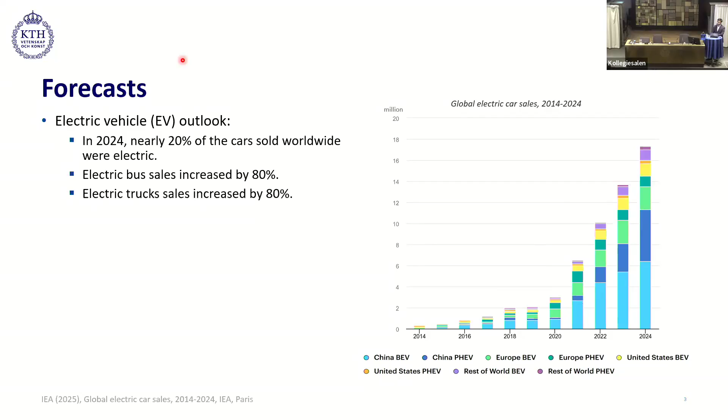Let's directly jump to the forecast. The International Energy Agency published a report in 2025 stating that in 2024, around 20% of cars sold worldwide were electric, including both plug-in electric vehicles and battery electric vehicles. On top of that, the sales of electric trucks and electric buses also increased by 80%.

According to this study released in 2021, approximately 8 to 20% of the cost of a battery electric vehicle is taken by the electric powertrain, and out of that 8 to 20%, 45% is taken by the inverter itself. Therefore, with electrification, the demand for electric energy converters as well as semiconductors is also projected to increase.

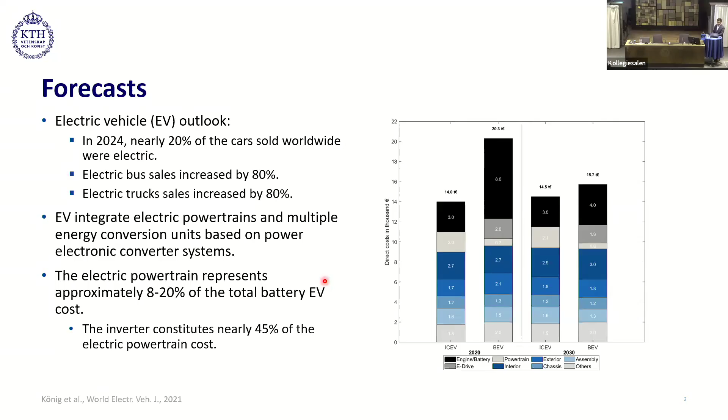We see that silicon carbide MOSFETs are becoming a favorable and popular technology, at least in EV applications, because they provide advantages over silicon devices. For example, they have better thermal conductivity, higher melting point, higher energy band gap, and high critical electric field. In 2022, McKinsey released a report projecting the growth of the silicon carbide market, saying it will grow by a CAGR of 26% per annum.

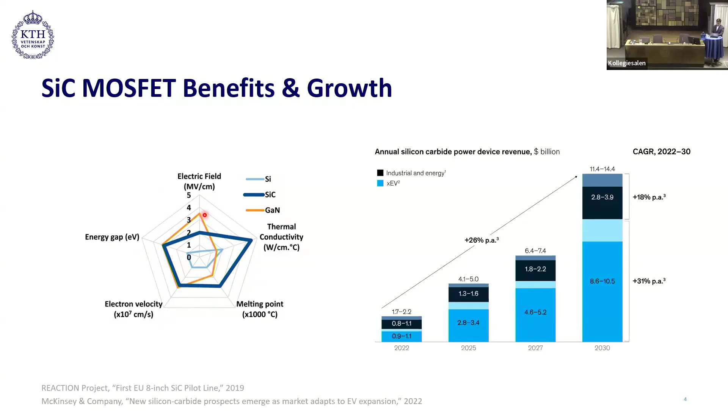With adopting new technology, it's also important that we understand it from the reliability perspective. In 2011, an industrial survey found that in power electronic converters, it's basically the power semiconductor devices that are most prone to failure. Even though this study is quite old, I think it still holds true today.

In another study, they identified that the primary cause for these failures is temperature, both in steady state form and in the form of temperature cycling.

Here we are looking at the picture of the temperature inside the power module. We see that the temperature inside the power module cycles in electric vehicle operation, both at low frequency, and if we zoom in, we see also the high frequency temperature cycling.

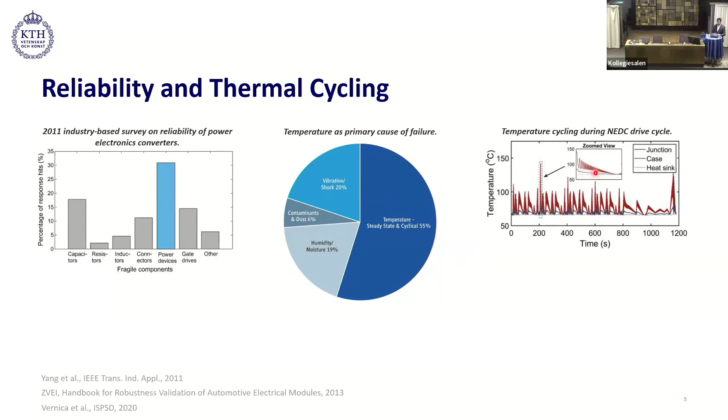Coming to the root cause of these thermomechanical failures that I have investigated. Here we are looking at the cartoon diagram I made of the power semiconductor module. We see that the power module is made of different materials. For example, in this case we see aluminum bond wires, and a silicon carbide MOSFET soldered on top of a DBC. The DBC has a ceramic with copper metallization on both sides, and that DBC is again soldered to the base plate, which is made of copper.

If you look into this picture, we see that the coefficient of thermal expansion of these materials is different. For example, silicon carbide is 3.4 and aluminum is 23. This introduces the coefficient of thermal expansion mismatch, and also the Young's modulus is different. In general, the thermal and mechanical properties of these devices are different.

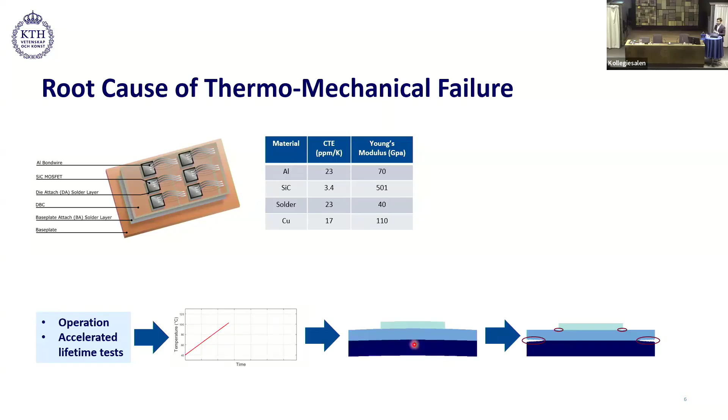During operation, the temperature inside the device cycles because of power losses, which results in thermal expansion and contraction of these materials. Since they have different coefficients of thermal expansion, the materials expand and contract at different rates. This eventually results in interfacial fatigue, which generates cracks, and because of the crack, delamination occurs, which eventually results in semiconductor device failure.

Here is one picture of a device that failed in KTH. It might not be clearly visible, but there is a crack at the interface of the bond wire on both sides. Therefore, this device failed at the end of the test due to bond wire liftoff.

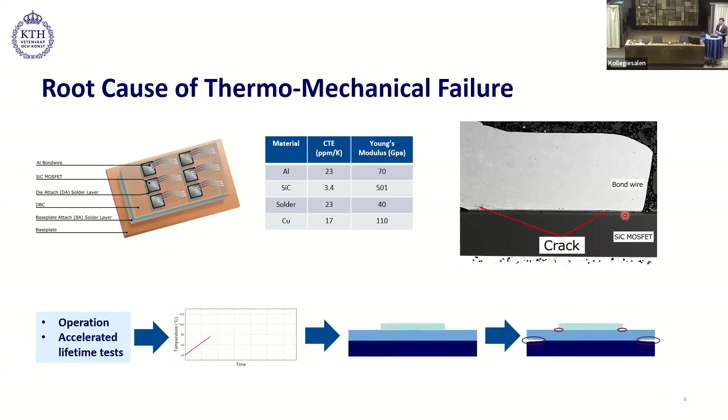Coming to the motivation, we were motivated to evaluate the thermomechanical performance of semiconductor devices, as well as develop health diagnostic methods to detect package-related degradation.

So we had two objectives in this thesis. The first objective was to do the thermomechanical analysis of conventional and advanced silicon carbide MOSFET packages. This resulted in two contributions, and in those two contributions we generated three publications. In objective 2, we wanted to develop health diagnostic methods using the lifetime data gathered by degrading TO247 packaged silicon carbide MOSFET devices. Under this objective, we had 3 contributions, resulting in 5 publications.

Now I will go through each of these contributions one by one and present the results. Coming to contribution 1 under objective 1, here we will look at the thermomechanical performance of single-sided cooled packages.

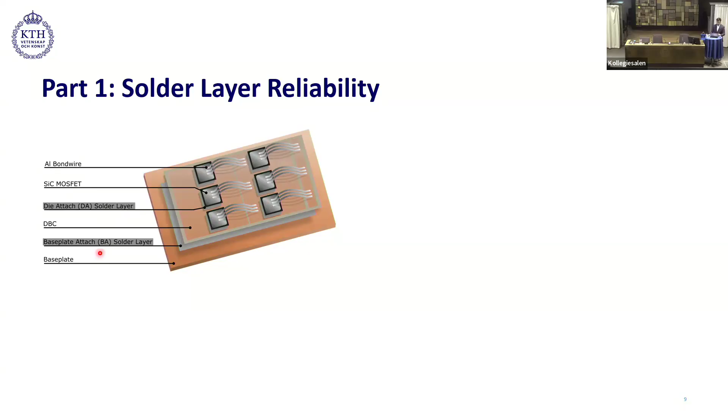In part 1 of this contribution, we will look at the solder layer reliability. We are again looking at the picture of a power module, and we see that there are multiple dies connected inside these power modules. A power module can have many dies inside it, and these dies can be at different locations. We see that the reliability of the solder layer, present in the die attach and the base plate attach layer, can vary depending on the location and the number of dies in the module.

We did a simulation study using finite element modeling, and divided the study into 3 packaging configurations: symmetric, where the die was located at the center of the package; asymmetric, where the die was located in the corner; and full power module, where we had 3 dies connected in parallel.

First, we will look at the thermal performance of the solder layers. This was done using power cycling tests, PCT-sec and PCT-min. According to the ECPE AQG 324 standard, power cycling is divided into 2 categories: PCT-sec, meaning the heating time is less than 5 seconds, and PCT-min, meaning the heating time is more than 15 seconds. So PCT-sec can also be called a fast power cycling test, and PCT-min can be termed a slow power cycling test.

We ensured that the temperature cycling inside the module, or the junction temperature, remains the same across all cases, so we adjusted the heat losses accordingly. Another thing to note is that the base plate attach solder layer temperature cycling is different during PCT-sec and PCT-min. In PCT-min, the base plate attach solder layer exhibits higher temperature cycling.

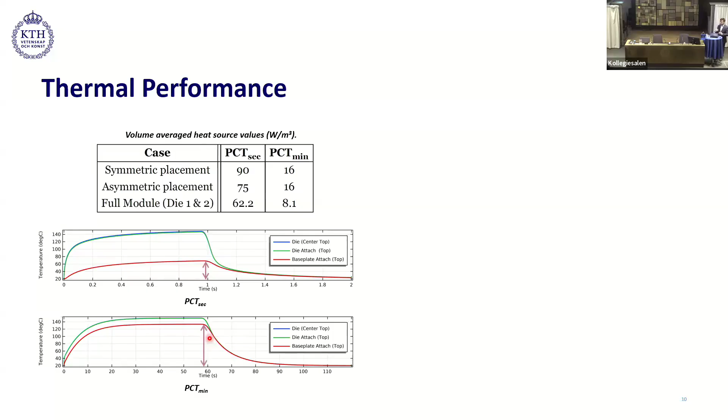Looking at the temperature distribution in the die-attached solder layer during PCT-SEC. We see that depending on the location of the die inside the package, the temperature distribution also varies. For example, in symmetric condition, the high temperature region is presented towards the central region, representing the center part. However, in asymmetric, the high temperature region moves more towards the corner, and the same happens in the full module.

Due to the thermal coupling effect, the temperature in the full module is also impacted by the second die, which is connected in parallel. When we look at the temperature profile plotted across this diagonal, we see that during PCT-SEC, a high temperature gradient is observed. However, during PCT-min, this temperature gradient reduces. Another important thing to note is that in asymmetric and full module cases, the region closer to the DBC corner and edges has higher temperature than the other end.

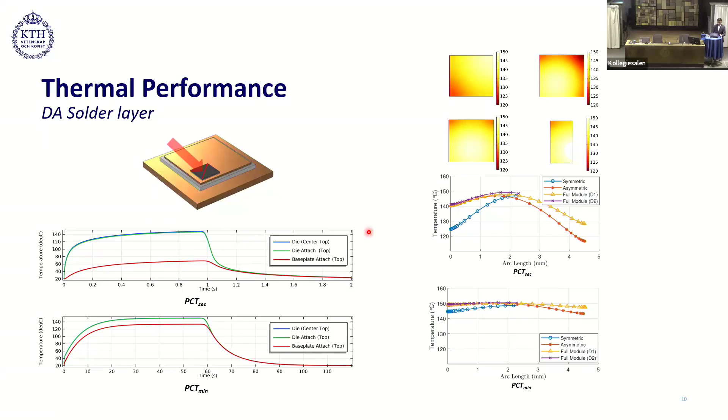Now looking at the thermal performance of the base plate attached solder layer, analyzed during PCT-min. We see that depending on the location of the die inside the package, the temperature distribution inside the base plate attached layer also changes. For example, in symmetric, we have the high temperature region in the center. However, in asymmetric case, the high temperature region moves towards the corner or the edge. Additionally, the presence of more die introduces more high temperature region, I will say.

Now I will go through the mechanical performance of the base plate attached solder layer. Again, we use accumulated viscoplastic strain as a performance criteria, and this was done during PCT-min power cycling. In the symmetric and asymmetric case, we observed that it's mostly the corner regions which exhibit higher viscoplastic strain accumulation. We didn't see much difference between symmetric and asymmetric, but in the full module, a big portion of the edge experienced higher viscoplastic strain accumulation.

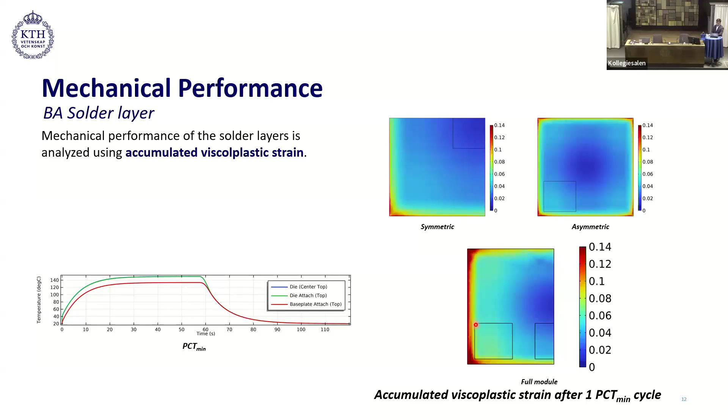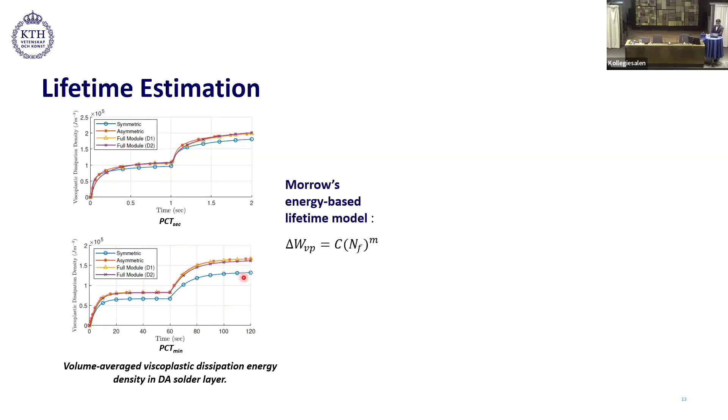We also did a lifetime estimation study using Morrow's energy-based lifetime model. Here, we used viscoplastic dissipation energy density in the die-attached layer to calculate the lifetime of the die-attach. We see the viscoplastic dissipation density during PCT-SEC and PCT-min, and depending on the configuration, the dissipation energy density also changes. We feed this dissipation energy density into Morrow's energy-based lifetime model, and the software gives the lifetime distribution in the die-attached solder layer. We see that in the symmetric condition...

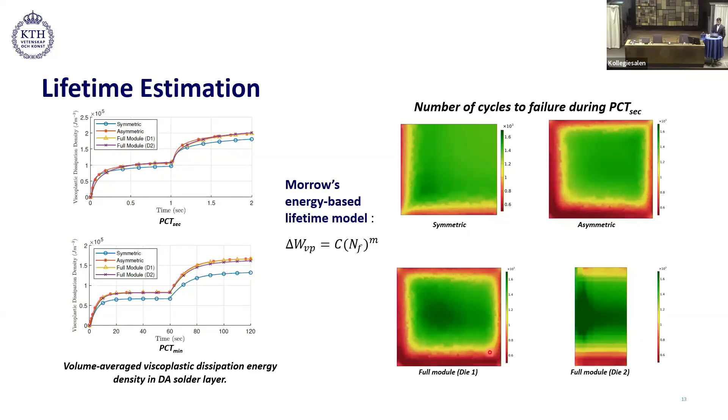In all the cases, the solder material experiences a lower number of cycles to failure around the edges, like here and here, represented by red and dark red color. We see that the symmetric power module exhibits a higher number of cycles to failure in comparison to the asymmetric and the full module. In these regions, they have the minimum number of cycles to failure. Plus, in this region, in the full module, the number of cycles to failure also reduced because of the presence of parallel die.

If we look at PCT-min, then the lower number of cycles to failure distribution is uniformly distributed around the edges. So from this study, we concluded that the location of the die inside the package, and the number of dies we have in parallel, affects the reliability of the solder material used inside the package.

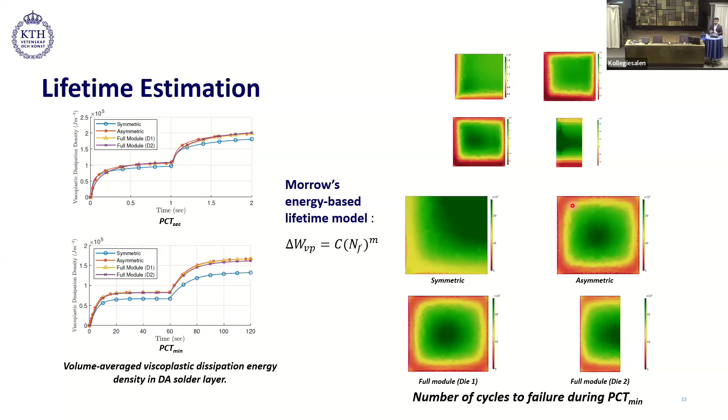Coming to part 2 of this contribution, here we analyzed single-sided cooled packages, advanced packages. This study was divided into 4 packages: aluminum, the one with aluminum bond wire, second with copper bond wire, third with sintered copper clip, and fourth with sintered copper foil, having copper bond wire on top. In order to make this analysis simpler, we divided these packages into 6 cases. It's also important to note that in the die attached layer and in the base plate attached layer, we are also investigating solder and silver sinter in order to do the comparative analysis.

Now coming to the thermal performance of these packages. This was evaluated under steady state condition. In this figure, we are looking at the power losses that the module was able to handle for the same steady state junction temperature.

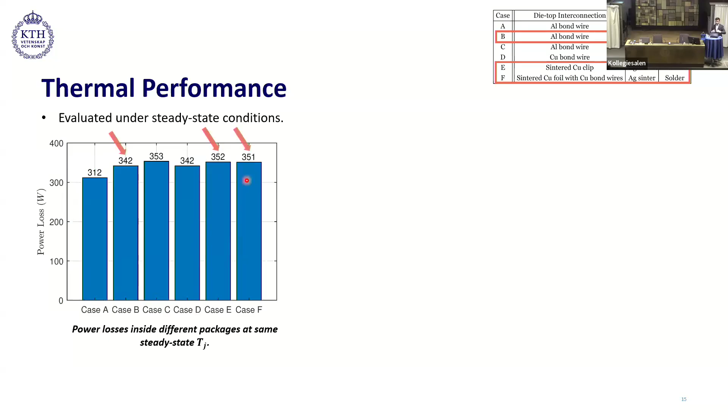If we focus on the first 3 cases, we see that we have aluminum bond wire on top, but the die attach and base plate attach material is changing. We observed that by replacing solder material with silver sinter, we have better thermal performance. If we also focus on case E and case F, then we see that introducing copper clip or copper foil on top also improves the thermal performance a bit.

In this figure, we are looking at the vertical temperature profile through the die center in case A, B, and C. We see that the temperature drop across the solder, represented by this blue curve here and here, is higher than in silver sinter. That's because solder material has higher thermal resistance than silver sinter.

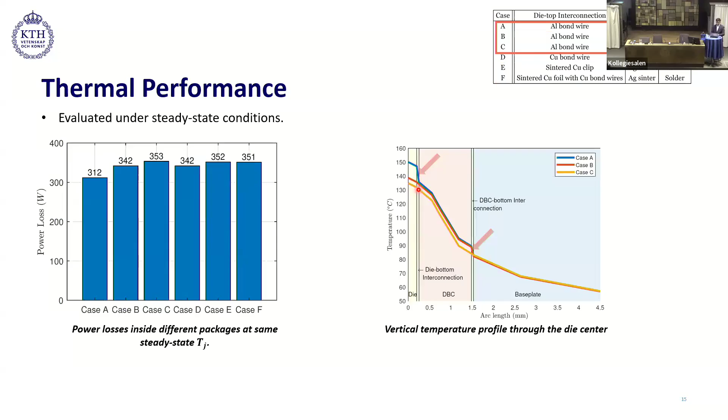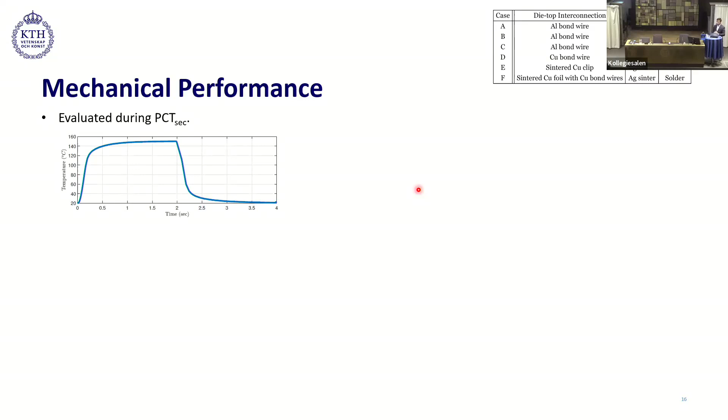Now, looking at the mechanical performance of these packages, this was evaluated using PCT-SEC power cycling. Here, the cooling time and heating time are set to 2 seconds each. First, we will look at the die attach layer, which involves solder or silver sinter, and again we use viscoplastic strain accumulation as a performance criteria.

Here, we are looking at the accumulated viscoplastic strain during one PCT-SEC cycle, and we see that the die attach solder layer exhibited higher viscoplastic strain accumulation than silver sinter.

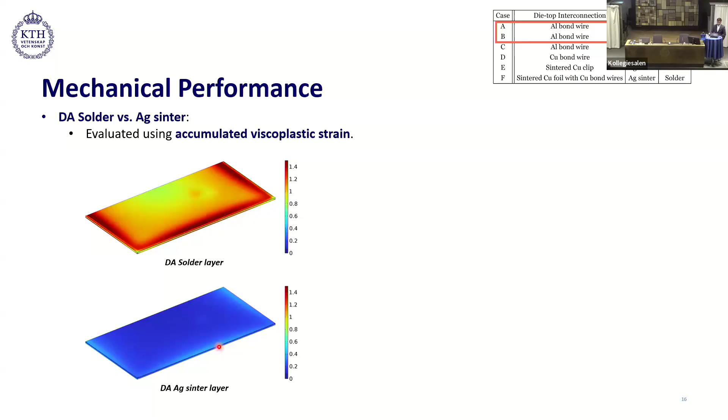We also calculate the volume averaged viscoplastic dissipation energy density in the die attach layer. We see that the solder layer, represented by this blue curve, exhibited higher viscoplastic dissipation energy density than the silver sinter material, which is shown by these plots here.

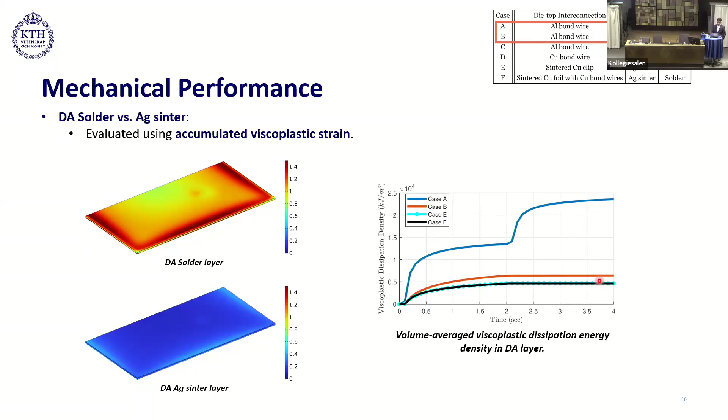Therefore, we concluded that the kind of material we have inside the package, the mechanical performance and thermal performance will change at the die attach. Now we will go through the mechanical performance of the die top side interconnection.

First, we will start with bond wires. So the performance of the bond wires was evaluated using von Mises stress and also accumulated plastic strain.

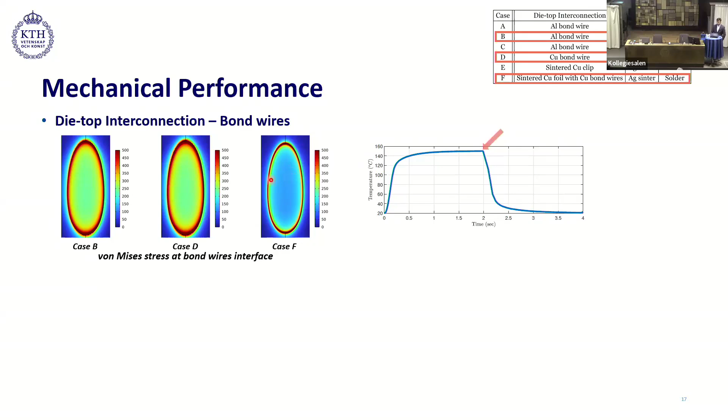Now, looking at the die top interconnection silver sinter, here we see the viscoplastic strain accumulation in die top silver sinter layers. If we focus on this region, then we observe that in case of copper clip, the die top silver sinter accumulated a bit higher viscoplastic strain than what we used in case of copper foil.

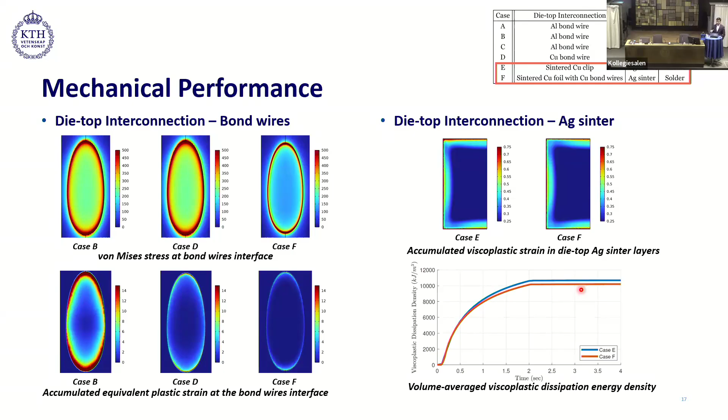Looking at the volume averaged viscoplastic dissipation energy density, we see that it is a bit higher in case E with copper clip than case F with copper foil. So from this study, we concluded that the kind of material we are using inside the package, and also the kind of configurations we have in the module, both the thermal and the mechanical performance can vary.

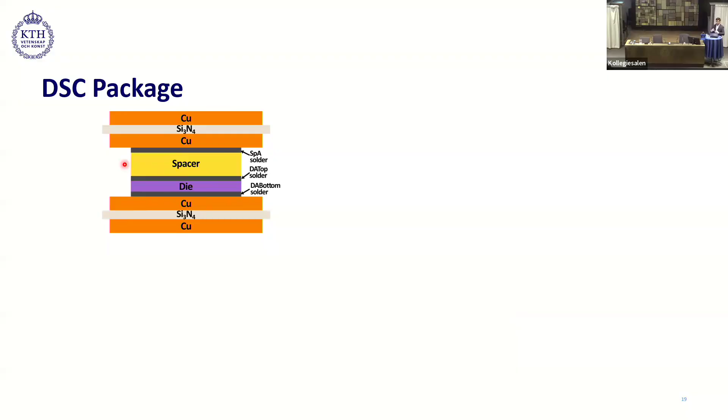Coming to contribution 2 of objective 1, here we analyze the thermomechanical performance of double-sided cooled packages. The double-sided cooled packages are becoming quite famous now because they allow for higher heat dissipation from both sides, top and bottom. However, in order to create some space inside the package which facilitates connecting the gate terminals, we introduce a spacer inside, and we were interested in studying the impact of the spacer material on the reliability of the solder layers.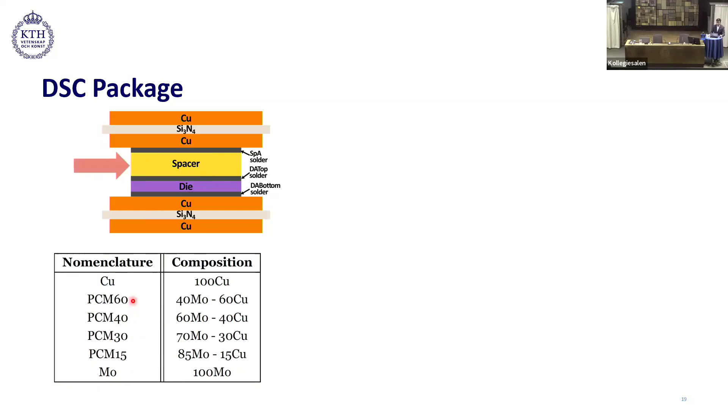We used spacer materials that were composed of different percentages of copper and molybdenum, and depending on the percentage of copper material we have inside the spacer, this number varies. So basically, 60 here represents 60% copper. Since copper has 3 times higher coefficient of thermal expansion than molybdenum and 3 times higher thermal conductivity than molybdenum, the thermal and mechanical properties of these spacer materials will also vary with the percentage of copper and molybdenum inside them.

Starting with the thermal performance of these packages, this was evaluated at steady state. Here we are looking at the power loss that these packages were able to handle for the same junction temperature. We see that double-sided cooled packages, represented by these bar plots, have higher power loss handling capability than single-sided cooled packages. Also, the power loss handling capability increased with increase in copper percentage in the spacer material.

Looking at the vertical temperature profile through the die center, we see that molybdenum exhibited a higher temperature drop across it than copper. That's because molybdenum has 3 times higher thermal resistance than copper.

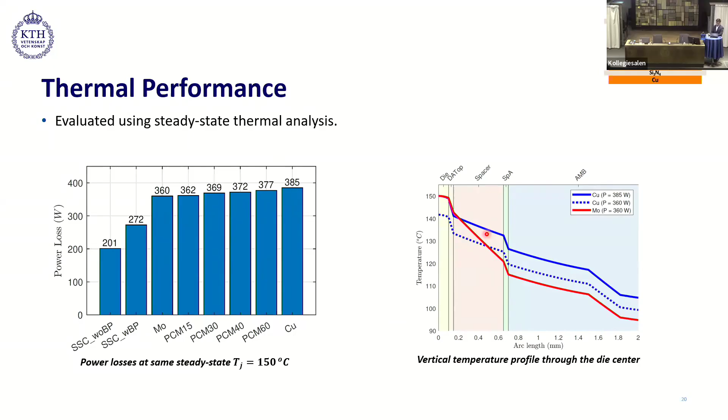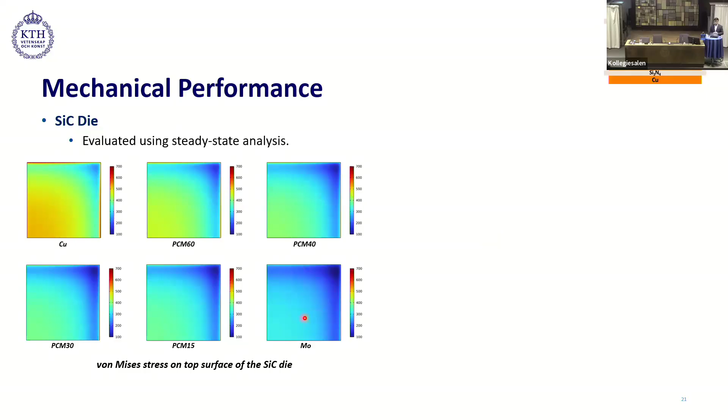Coming to the mechanical performance of these packages, first we will start with the silicon carbide die. This was evaluated using steady state analysis, and we used von Mises stress as a performance criteria. What we see here is von Mises stress on the top surface of the die, and we observed that von Mises stress is higher when the copper percentage in the spacer composite is also higher, and it reduces with decrease in percentage of copper. Therefore, in case of molybdenum, we see minimum von Mises stress on the die.

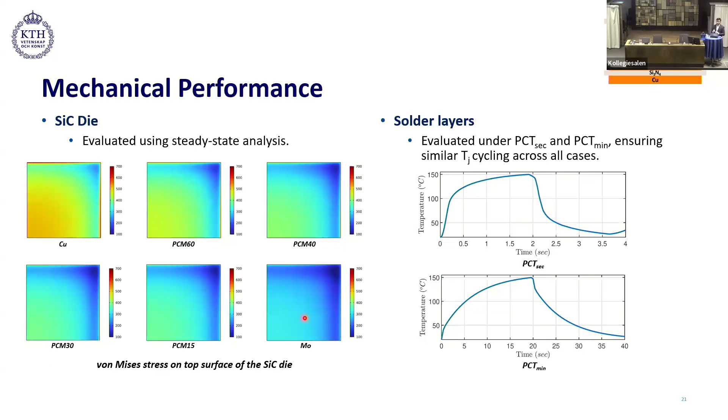The performance of the solder layers was evaluated using PCT-sec and PCT-min power cycling conditions, ensuring that the junction temperature profile is the same in all cases.

In this case, we took a different approach. We basically used the 10% delamination criteria. In this figure, you are looking at the viscoplastic dissipation energy density distribution around the edge, and we see it's uniformly distributed. So we have a quarter symmetric model in this case. We use line 1 to calculate the viscoplastic dissipation energy density.

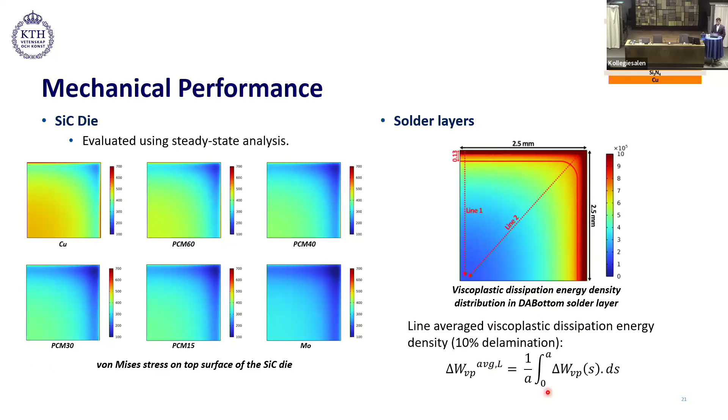Based on the 10% delamination criteria, we calculated this length, which we call crack length, and it is 0.13 mm. Then this viscoplastic dissipation energy density in this crack was fed into this formula to calculate the line averaged viscoplastic dissipation energy density.

Therefore, from the study, we concluded that depending on the kind of spacer material used inside the double-sided cooled packages, the thermal and mechanical performance can both change. Therefore, it's important to optimize the package depending on the operation.

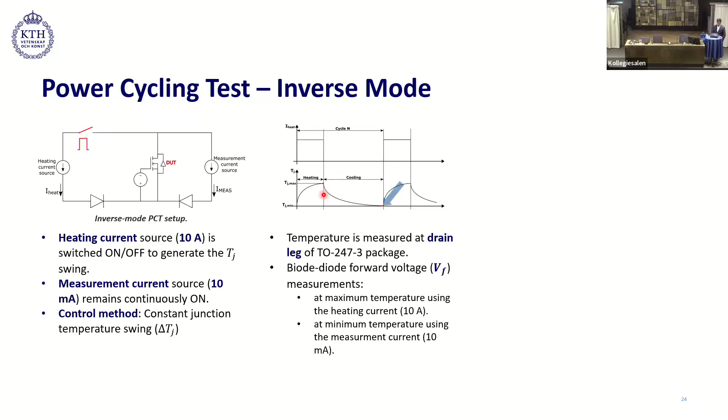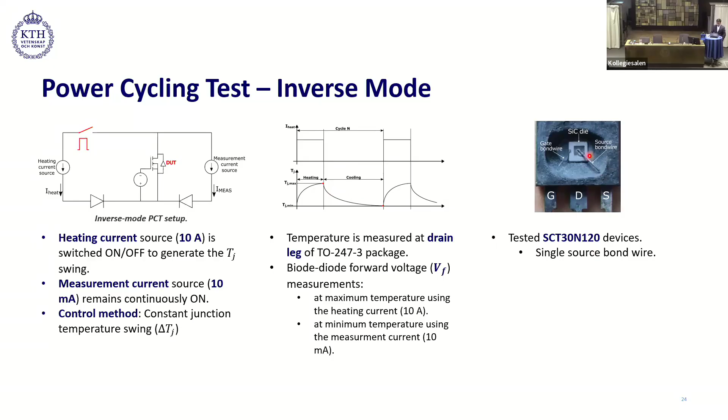We tested the devices from STMicroelectronics. Here is the model number. This device has only a single source bond wire inside it. This is the gate bond wire, but what we are interested in is the source bond wire, which is this one.

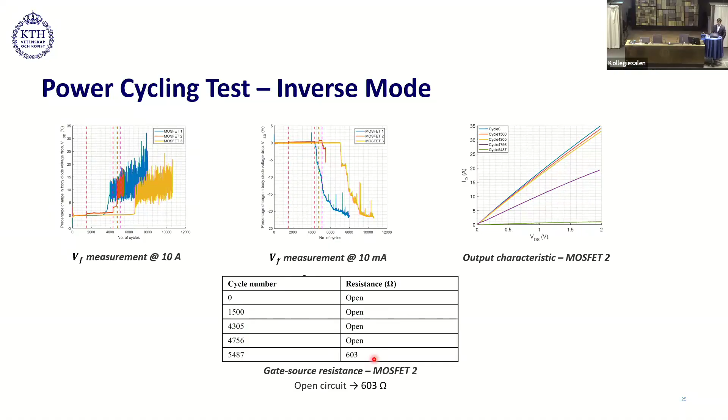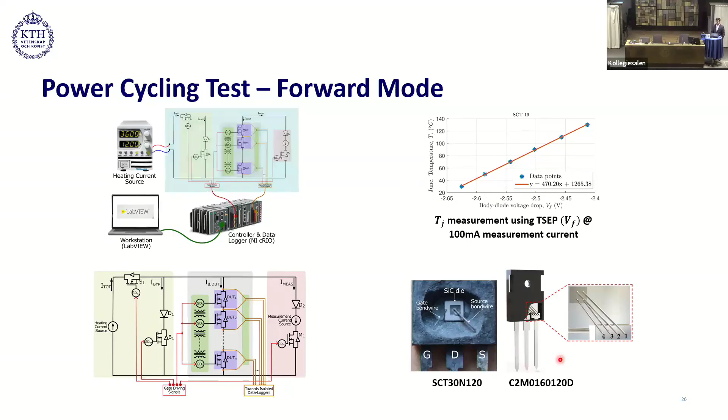We tested two different kinds of devices using this test. The first is from STMicroelectronics with a single bond wire, and the second is from Cree, which has four bond wires connected in parallel.

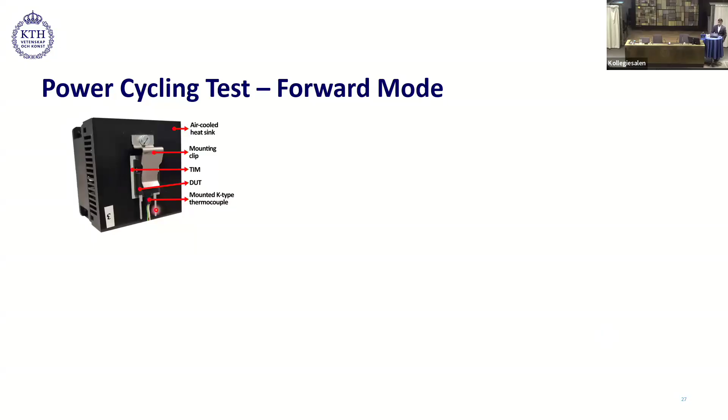This is how the DUTs were mounted. We had an air-cooled heatsink for each DUT, and the DUTs were mounted on these heatsinks with the help of a clip. We have a thermal interface material between the heatsink and the DUT. During the test, we also measured the temperature of the middle leg with the help of a K-type thermocouple.

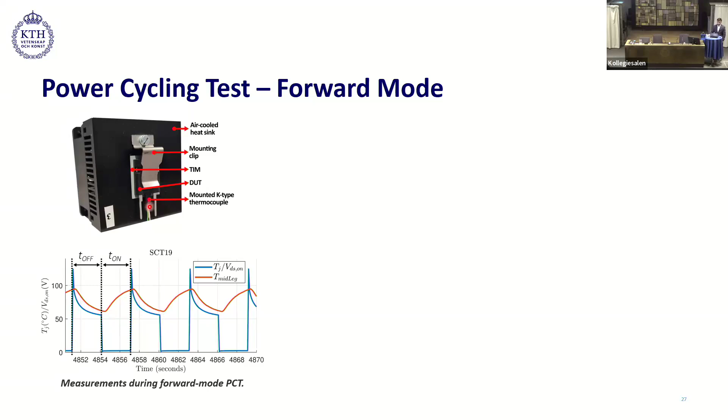Here we are looking at the measurements during the forward mode power cycling test. We see that during the cooling time, T off, the temperature dropped, and during heating time, T on, it represents the on-state voltage. The red curve represents the temperature measurement done at the middle leg with the thermocouple. We see that the temperature increased during heating time and then drops during the cooling time.

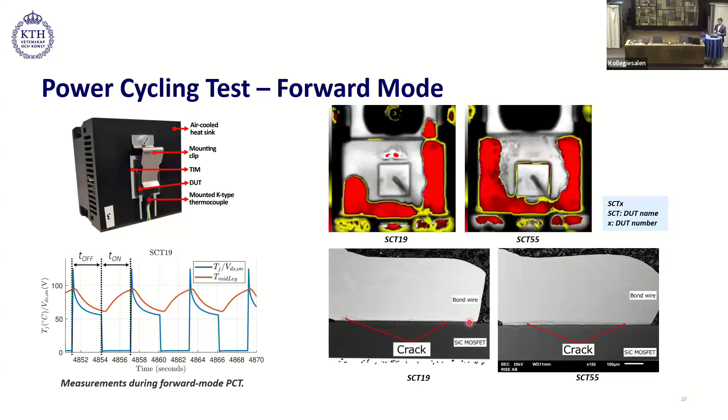We also did cross-sectioning and then took scanning electron microscopy images. In both devices, cracks were observed at the interface of the bond wire. Therefore, these packages have mainly failed because of bond wire failure. So we used their test results to develop health monitoring techniques by compensating on-state resistance.

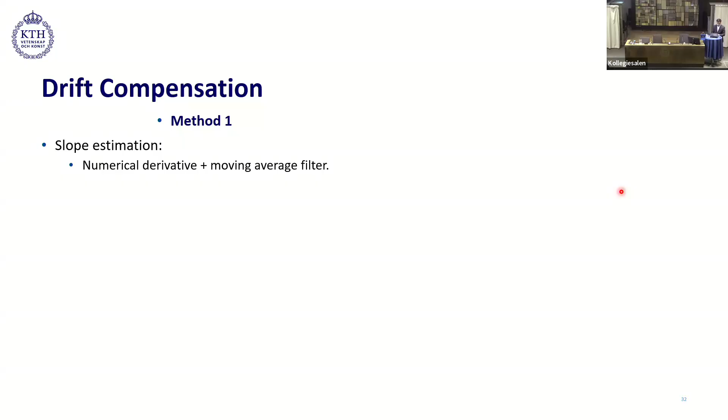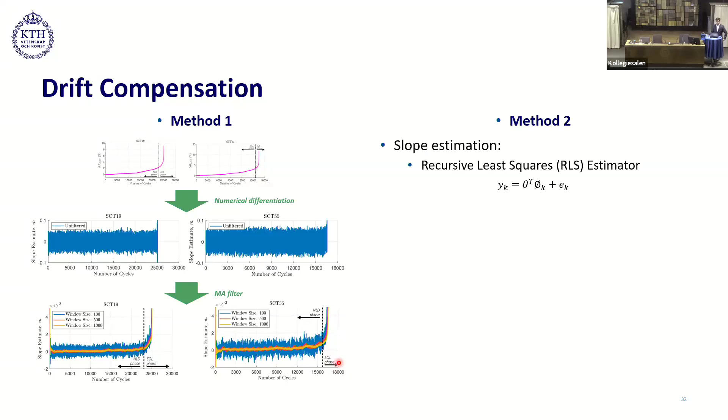We also developed a second method which used a recursive least squares estimator. Here we fed the temperature compensated signal into the RLS estimator, and it directly gives the slope estimates. One important thing to note in the recursive least square estimator is the term lambda, called the forgetting factor. The value of lambda is selected depending on how fast your signal is changing. If the signal is changing fast, it should be lower. But in our case, we have a slow increase in the beginning and then a very fast increase at the end.

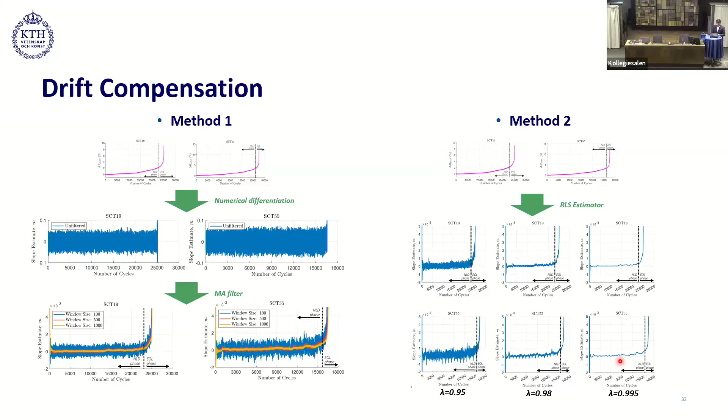So from this contribution, we were able to finally develop a method which can be used to detect package-related failures in TO247 package. We used the same method in the device with multiple bond wires and proposed that this can also be used for detecting bond wire lift-off events in the package.

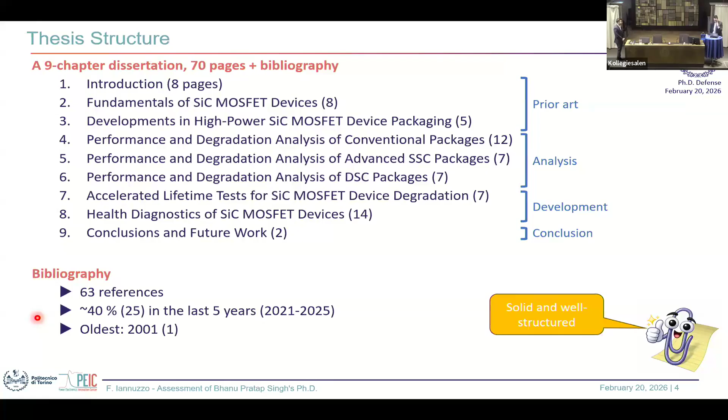Perfect, that's great, let's move to the scientific outcome. You published 1 journal publication plus 2 submitted. I have a little bit of comment here - it's a little bit close to the limit, I would have expected a little bit more in terms of productivity. However, you have scored 5 conference publications, right?

And 5 more conference publications, which for some reason are not included in this PhD thesis. 2 of which are actually relevant to your topic - one is reliability study on SiC MOSFETs following partial failure, and the other one was on online condition monitoring, the other 3 being a little bit further from it. So fine, I would say. I couldn't evaluate these 2 by any means, simply because you didn't include them - I was in principle not allowed to look outside the borders.

Let's move to the purpose of your thesis. By the way, at the time I prepared this slide deck, I didn't attend your presentation, so every single consideration from this slide deck is coming from your dissertation and nothing else. According to section 1.2, you want to investigate thermo-mechanical performance - we saw an interesting presentation on your side - understanding their failure mechanisms, examine advanced packaging materials to improve performance, absolutely.

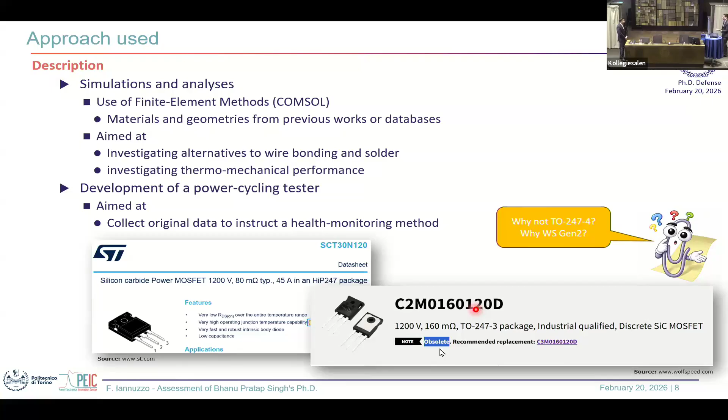Once this one has been said, I think we are on the same page. I think what I mentioned is actually somehow matching what your PhD thesis was. So let's go to comments and remarks, which is obviously the biggest part of the story, right? Chapters and publications, obviously, because this is a collection of papers.

Let's start from minimal things. Reference 2 is appropriate, so I was reading and actually was thrilled by your introduction because you did a great job also in the introductory part. However, I have the bad habit of stopping at the reference and going to page 74 to check it. And then reference number 2, Gupta and Mazumder, reactive power compensation in a single stage differential mode solid state transformer.

When we talk about the application of energy transition, I would say it's not appropriate. I would say in that respect I would have used a more general review paper talking about transition, talking about efficiency, and not really about an algorithm, right? A compensation of reactive power, right?

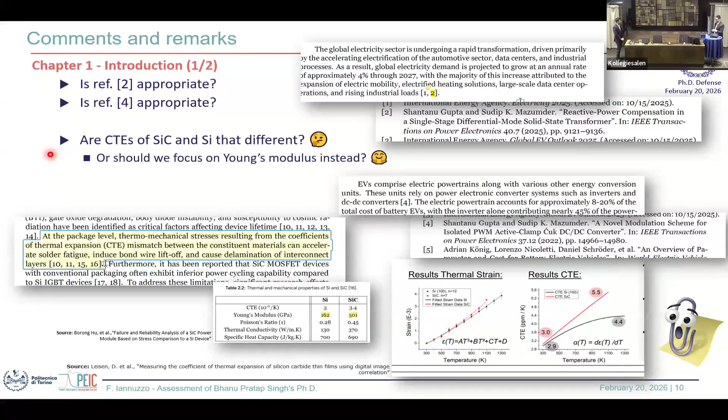Still introduction, chapter 1. Oh, by the way, this was kind of a praise of mine. Every second PhD defense I attend, or I'm opponent about, is about artificial intelligence in power electronics. Thank you actually for not stating that artificial intelligence is essential nowadays to understand power electronics and reliability. That's definitely not true. I mean, artificial intelligence is a key technology, but not in our field, not at the moment, I would say. So thank you very much for this. But this was a little bit for fun.

Let's move to chapter 2, which is actually, I would say, the core of your thesis. You made a lot of calculations, which are actually correct. I checked, I agree with each step of your calculation. However, you disappointed me because we ended up in an experimental, empirical relationship, which is true as well, between on-state resistance and gate source voltage.

So this is actually measured, right? So you made a lot of mathematics, I mean a lot, nice and acceptable level mathematics, but you end up in a measured something, right? You never use this mathematics any longer. Probably you mentioned it once where you talk about the relationship between the on-state resistance, which is indirectly related to the threshold voltage through the channel resistance, right? And you correctly stated that there is a direct, one-to-one relationship between threshold voltage and the channel and RDS on. But other than this, you're not really using this one.

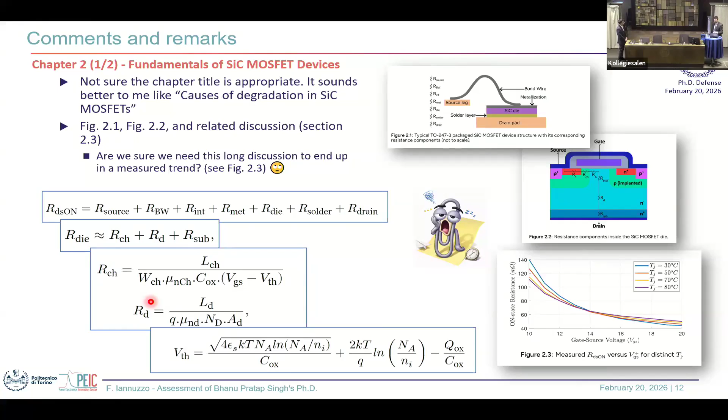Still chapter 2. Again, we discussed about this, so I don't want to touch this anymore.

Now, in my experience, this is actually quite general, it's not just related to chapter 2. In my experience, using the temperature swings you have been using, no matter PC min or PC sec, I observe, using your numbers, 145 maximum junction temperature, I don't remember what your temperature swing was, in the range of 60 Kelvin or whatever, I get in the range of 100,000 cycles to failure. You have one order of magnitude less.

I can comment on that. Yes, so basically, as I mentioned, we use this Morrow's energy-based lifetime model. The parameters were not experimentally driven, they were taken from the previous study. And these parameters depend on the material type and the dimensions of the material.

We ensured that we had the same material, so the study we were referring to while doing the simulation, we took the material from there. So regarding the material, that is satisfied, but the dimensions might be different. So that's why I think... that's one thing for sure, but you have also experiments.

And your experiments, you fail actually, your devices, your samples in 25K, 30K cycles. Yeah, but it's a bit different. The experiments we had in TO247, that one has a lead-based solder. And what we used in the simulations, when I started my study, I started with the simulation, and the final motivation was to fabricate the package using the materials that we are using in the simulation.

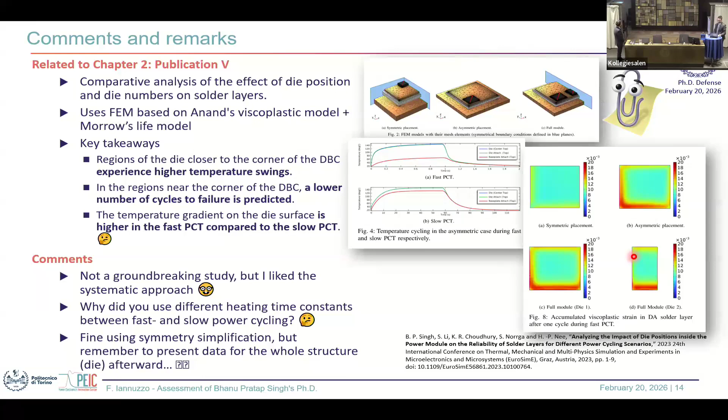And by the way, the footprint of your bond wire, you gave me the impression that the footprint geometry was a bit of a given, so you took an oval, not really. Yeah, in the final year we were also trying to investigate the bond wire, at that time we had a different geometry, but this was the first bond wire that I modeled, and I kind of felt it, but fine, it's fair. Again, as I mentioned before, good.

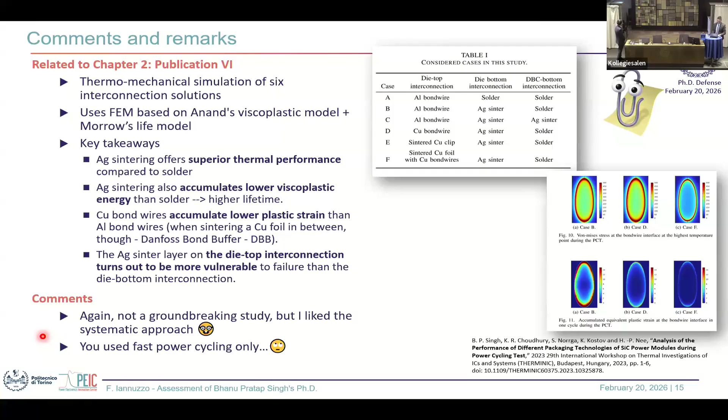Who was it telling you this? No, it was only me actually, so I was investigating this. Yeah, we didn't, I mean during simulation. Devil is in the details, right? It was so easy, fantastic, same temperature, I can parallel this network. No, you're not allowed, different temperatures.

In general, also in particular, when you stack up devices, how can you assume the top heatsink stays at the same temperature, and even in a particular time instant, how can you assume it lasts forever? They have different stories, one heats up faster than the other, cools down faster than the other. So this was a background assumption which is not necessarily correct in general. I understand the outcomes of your study, however it is not as general as needed.

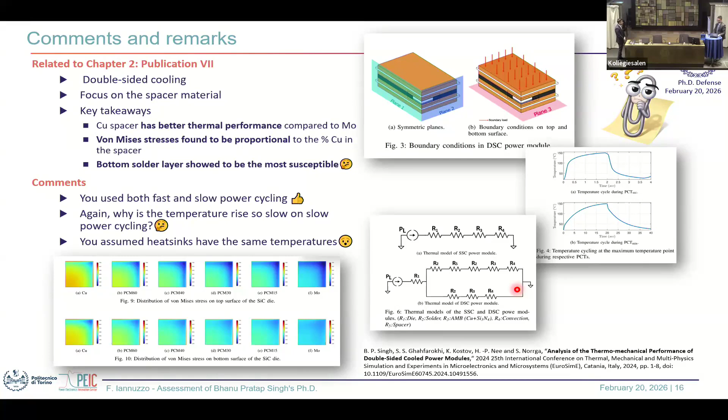I understand, alright, this was a conference. Yes, EuroSimE. Yes, this was a EuroSimE. Okay, chapter 3, developing packaging.

The main difference between silicon, in my opinion, talking about packaging challenges moving from silicon to silicon carbide, is power density. You can handle the same current with basically the same voltage drop, the same losses, with a quarter or a fifth of the area. Silicon carbide chips are smaller than IGBT or equivalent silicon devices. Power density is a key point, you didn't mention it once, not a single time. That's the issue. Fortunately, silicon carbide has a much higher thermal conductivity, but this nice story ends 100 micrometers below the surface. So silicon carbide is fantastic, and then I have the same copper, the same solder, the same materials as before. So this is a key difference.

Disappointingly, I didn't find any comment on this. Fortunately, it was in the chapter introduction, right? But you didn't follow up on this.

This actually triggers a lot of discussion and speculation on materials, on why the corner is worse than the center, because of power density first of all. The temperature swing in silicon would have been still acceptable, whereas in silicon carbide would definitely not, because of power density. You missed a nice opportunity here.

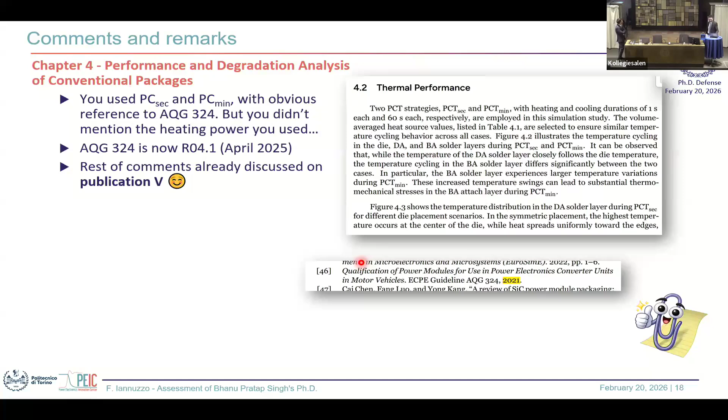Yes, nothing. Oh by the way, AQG324 has now a new version, you know this, right? I'm the only one here who went through the references, probably. Really? 2025, version 4, all right?

Chapter 5 is basically publication 6, I have no single comment there, please correct me if I'm wrong. Chapter 6 is basically publication 7, am I right here?

Yes, this was my best finding. Yes, my best understanding here. So we skip this.

Chapter 7 now becomes a little bit interesting, I would say, because I'm an experimental guy. I come from the soldering iron, you know? So be careful, be prepared.

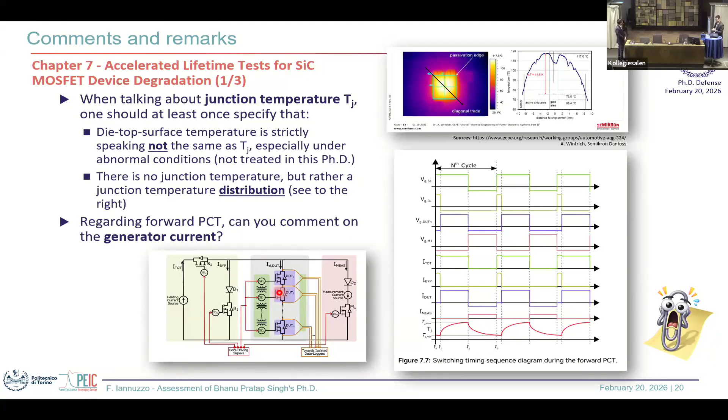So this jumped immediately to my eyes. I cannot disclose why, because my PhD student was great on this, but that's another story. No way. I mean, of course your conclusions are sound because you actually power cycled your devices, but you also power cycled your generator. So it's not about your conclusion, it's about the health or remaining life of your generator, which is worth the publication itself. A little bit for kidding.

That's also interesting, I liked it very, very much. You talked about forward mode power cycling, inverse mode power cycling, and then I went to the kitchen and told my wife, okay, let's make a mix-max of the two, right? How can I decide which one to go for, and depending on what? Still a mystery, I cannot understand from you.

I have some ideas myself, if you want. Then we can discuss this when we take a coffee or eat together. But now I don't understand, you didn't elaborate, you didn't even mention this. So why should you use this one for what, and why should you use that one for what? Can you elaborate on this?

Yeah, so according to the standard, it's the forward power cycling mode that we do. So we basically use the drain current to heat up the device. That comes from the standard. It also kind of implicates the real-time application where mostly the current flows through the drain. In the inverse mode, we also see degradation related to the bond wires.

I mean, inverse mode is easier to implement, so it's much more tempting than forward mode. But why not use inverse mode only? Because we wanted to go with the standard and use the real test procedures that have already been followed. Then why don't we just use forward mode only? So we used forward mode, but we started with inverse mode because, as I mentioned, it's much more tempting and easier when we started.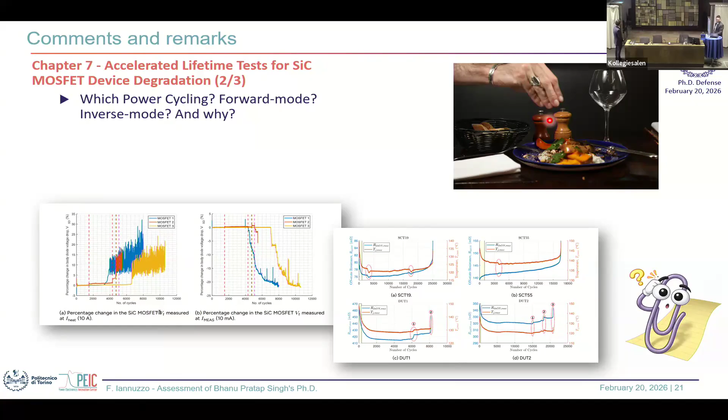Failure analysis. Oh, by the way, I have a question: did you perform failure analysis yourself? No, we outsourced it. I didn't do it myself. Okay, yes, this is true for both scanning acoustic microscopy and SEM. Yeah, it's fine, no problem. No one is supposed to be owning every kind of instrument and facility.

So, fine. Red — this is quoting your statement: red regions indicate delamination. The only lamination I see here is between the plastic and the lead frame. So this is not worth it all, I would rather zoom in. This is something you claim is about the lamination, but my educated suspicion here is that this delamination is actually between the plastic and the chip. Look, it belongs to the same region, right?

I didn't go very deep into the papers' contents, but I believe it's one of the transaction papers - we showed the solder layers have a small cracking there. But in the thesis I didn't put it. I would have mentioned this more clearly and not relied on the first. I can imagine this is the best picture out of your 60, 70 samples.

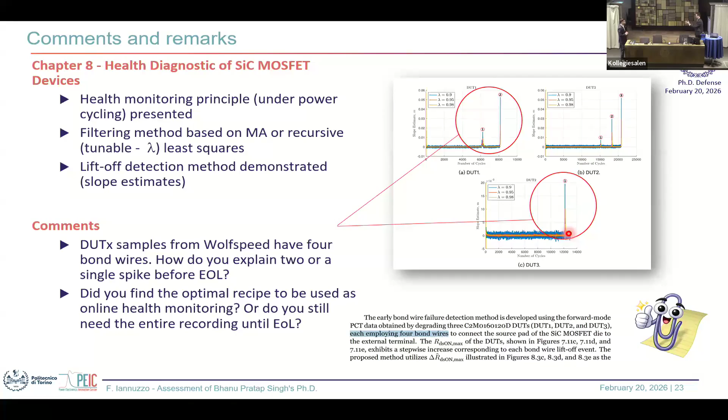So I was really looking forward to learn how early it is - early for you. But okay, it's the first, right? So I would better call it first bond wire lift-off instead of early, right? Good.

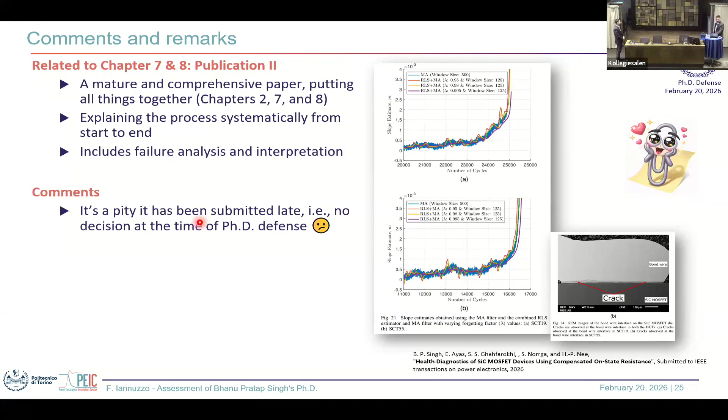You explained in chapter 7. No, this was chapter 8. Yeah. How early is early? We discussed this already, so I don't need to go any further into this.

You used 5 seconds or 10 seconds for power cycling. This was a little bit questionable because you put yourself exactly in the middle of fast and slow. Why? Just to make things more complicated, or what? It was a strategic choice.

I also copy-pasted the table here. Yeah, here it is. But I think this will be fast power cycling because heating time is less than 5 seconds. True, and you're right. But why not using 2 seconds? Why not? I mean, we were degrading multiple devices and we wanted to have different profile junction temperatures.

Okay, I understand. So you use 2, 3... Okay, I see the point now. Sorry, I didn't quite catch that at the time. So yes, you have 2, 3, and 5. Very good, yes, fine.

Oh yes, you did include a picture of the experimental setup. This was not my concern at this time, it was for your reviewers' concern. I don't know whether you got a comment on this. We didn't. Lucky you. But normally, if you have a setup, I would have included it. Yeah, that would be a good idea.

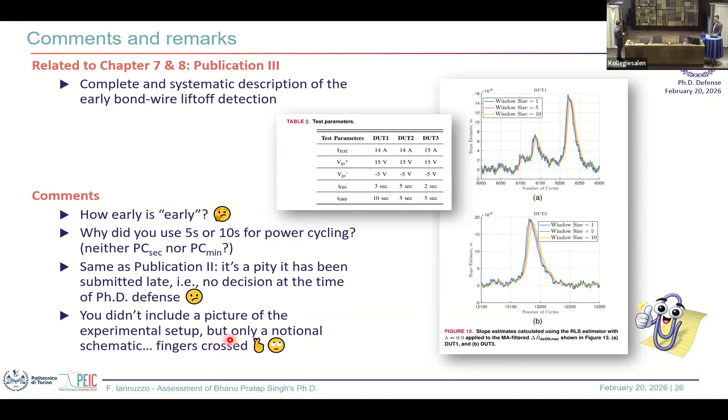This now takes me to minor comments. So we went through all the chapters except for the conclusions.

PDF links do not work. I love PDF, I mean, I will save your hard copy in my shelf, but I use the PDF and click like references, click, nothing happening. So for some reason... But I think I ensured that they were working. I don't know what's the problem here. So try, I will double check, yeah. All right, just for your knowledge.

Base plate attach, die attach. It took 5 minutes for me to figure out what it is. I understand. By the way, I hate acronyms. Acronyms are there for no reason, only for laziness. The reader is only puzzled all the time with acronyms. What the hell is this meaning now?

Oh my gosh, stopping. You are in the middle of... I understand. What is this? And then you have to stop, you have to jump. Why? Because you are lazy, not writing base plate attach or die attach, right? So I understand overusing the same wording is annoying. I understand, but sometimes just beginning with BA, DA, DA, BA, something like this.

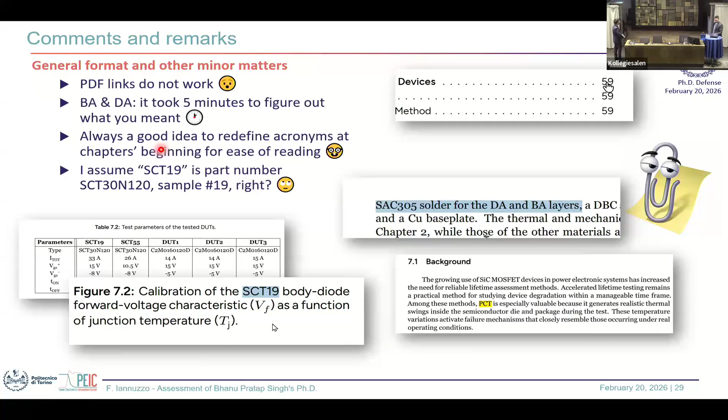Yes, that was long. Final checks. Did the PhD answer the research questions? Is anything missing from the expectations?

And this takes me to chapter 9. So you claim comprehensive investigation of package level reliability issues in silicon carbide MOSFETs. You claim your thesis is basically made up of 2 parts.

Yes, the first one regarding analysis, the second one regarding experiments. I would say they are a little bit imbalanced. So part one is obviously bigger than the second. I'm not saying the second is not sound, not at all, I'm just saying you spent more time on part one. That's how it is.

No comments here, no questions. This is what I figured out from your conclusions, and actually they all sound perfectly reasonable to me. So I agree with your conclusions, which probably is a major statement.

Thank you. Future work you propose - well, everyone is asked to write the future work, but nobody cares much about it. It's other people's business, not mine. So I will write it down, but I don't care more than that. Anyway, just to credit you, let's go through the future work.

Experimental validation of the proposed lifetime model - yes, please, I agree. New spacer interconnection material - yes, please. You don't just use molybdenum, you can use other compounds and other things. I agree.

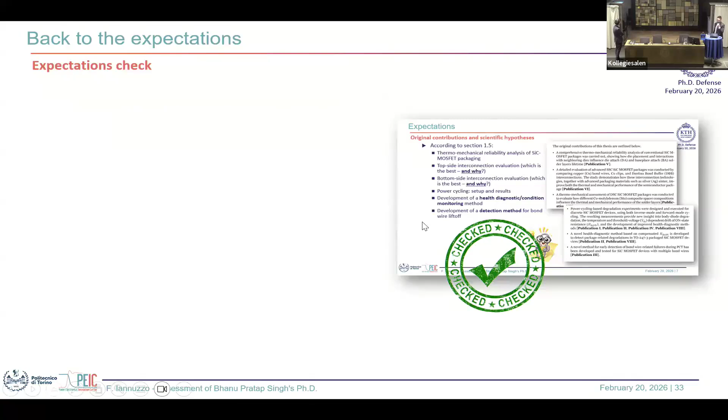Expectations. Back to slide number 7. So, thermomechanical reliability analysis of silicon carbide MOSFET packaging - come on, the whole chapter 2 was on this, plus publications. Top side interconnection - yes, you did it. By the way, I didn't see a single time copper bond wires on aluminum.

I think you'd break the chip. So you made simulations, fine, but it's kind of pointless because it's fine - it's one extra thing you did, I'm just saying it's pointless because you break it. And that's why Danfoss came up with DBB, because copper is actually, among other benefits from a thermal point of view, also spreading the soldering and bonding force when at the bonding time. So just for your knowledge.

But yes, bottom side interconnection, yes. Sinter, solder, yes. By the way, another comment here - you use only silver sintering. Copper sintering is becoming very popular because it's a lot cheaper than silver. Yes, now at least, but when you started, probably silver was not this expensive. Health diagnostics, you did. Detection method, you did. Early - we can talk later - but it is a detection method, so check.

Conclusions, without spoiler - I cannot tell you my opinion, this is secret, I will share with the committee later on, and then they will tell you in the end. How can we summarize your work? Well, a compound of 4 ingredients: thermomechanical finite-element simulations, analytical prediction of time to failure, component life power cycling, and data processing. Even percentages? No.

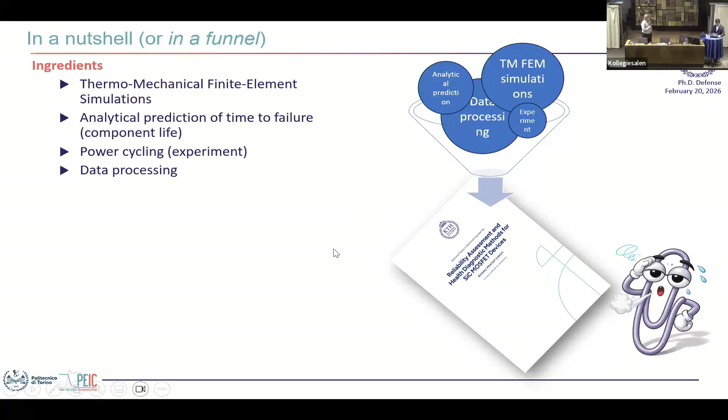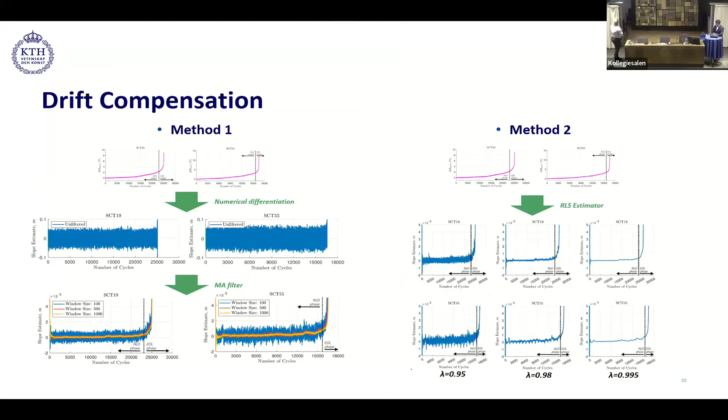Maybe not so important, but I heard Francesco ask you about the number of samples. Did you say 80 samples that you tried? In total, we degraded around 80 samples. And those you didn't take into the thesis, what happened with them? We have the data with us, so maybe a future student can use it.

Since those you presented seemed to have a big spread, I was curious, since you had so many samples, did the tests go okay, or did you have malfunctions for other reasons? So all the devices that we degraded were tested. They failed because of the reasons we were already foreseeing. Okay, so the test has worked properly, I would say. Yeah.

And also we see that we get reduced number of cycles to failure if we increase delta T. So we also looked into that aspect as well. So I think everything went well.

Then I was also thinking about the thermal grease or thin layer when you attached it to the heat sink. I guess these tests, when they are quick, are far too quick for any problems with the thermal grease, or?

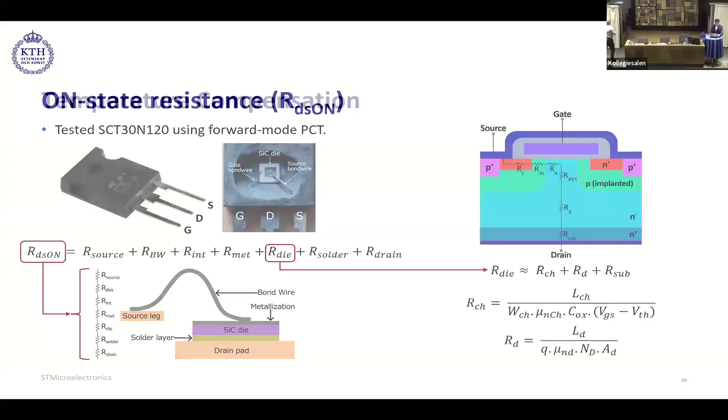So what we used in our case was the gap pad. It's soft, so it pumps out during power cycling. We see pumping out in all of them. And that's why, although I didn't mention it, you see the decrease in the maximum junction temperature in the beginning. That's because of the pumping out effect of the gap pad material.

Aha! I thought it was the reduction of the channel resistance due to change in threshold voltage. No, this temperature is also reducing, and this was because the gap pad was thicker in the beginning, and during power cycling it pumped out and became thinner and thinner.

No. And then I was a little bit surprised, because as you say, you see a pumping effect already during your test. But those devices were tested 3 years back, and the power cycling we did with multiple devices started last year, so we had a different thermal interface in that case. I would not like to link these studies together; I would say these are separate studies.

Yeah. A long time ago it was also very important in wind turbines, whether you mounted them horizontal or vertical, because you had a serious pumping effect if they were mounted horizontal. So which direction did you use? Let me think. So it was vertical. Okay, yeah, because we had a cool...

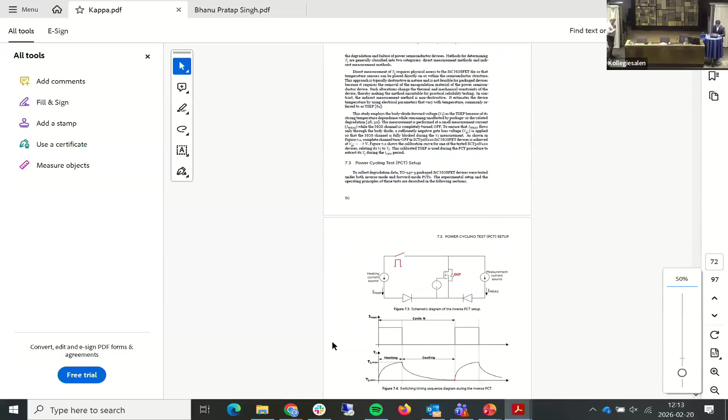Can you please explain which? Yes, it was the one plot where you had RDS as a function of gate source voltage. Okay, then maybe I should go to the thesis. This one? No, this is. No, it was the one where you summarized, I think, the channel resistance and the drift region resistance. But I understand it's not in the thesis, that figure, it's in the paper actually.

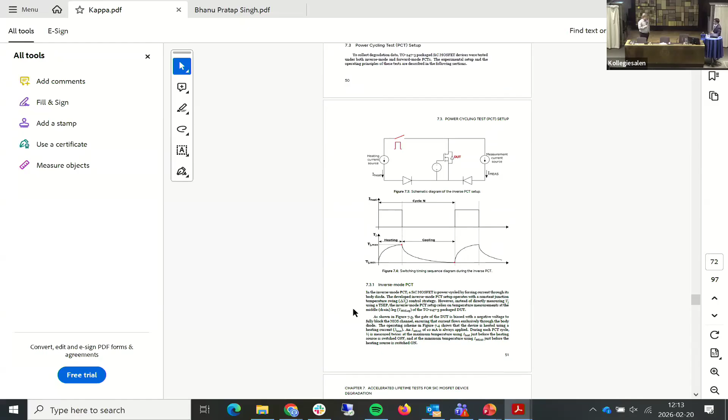Yeah, maybe it was. It shows the negative temperature coefficient and positive temperature coefficient, which Francesco showed in his presentation. Okay, but Francesco actually had this very similar question, and I was just curious if you tried to do some calculations, or you didn't do it at all. We didn't do it. We were more interested in seeing if it is showing the negative temperature coefficient or the positive temperature coefficient, and at what voltage level this transition happens. But we didn't validate the equation with the experimental part.

Okay, well, thank you very much. With this, I leave the word back to the chairman.